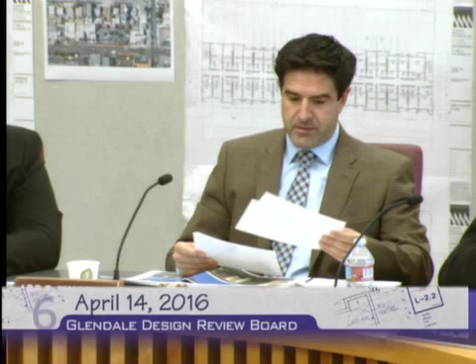Discussion is limited to items not on the agenda. I have no oral communication cards that have been submitted. Neither do I. Which brings us to staff announcements.

There is just one brief staff announcement having to do with an actual item on tonight's agenda, and that would be the first case for 401 through 409, that is, on Hawthorne Street. There is a continuance for this project in order to have the applicant prepare the correct historical assessment. So the continuance is being requested until June the 9th.

So this would be the first meeting in June for the Design Review Board. We would need to have an actual motion and a second and a roll call in order to continue that.

I'll make a motion to continue the matter. I'll second it. Okay, I have a motion by Board Member Mardian and a second by Board Member Charchian. In terms of roll call, Board Member Charchian? Yes. Board Member Benlian? Yes.

Which leads us to the next item on tonight's agenda, or I would turn the meeting over to Chairman Simonian, but I believe you'll be turning it back over to me. That's right, right back at you.

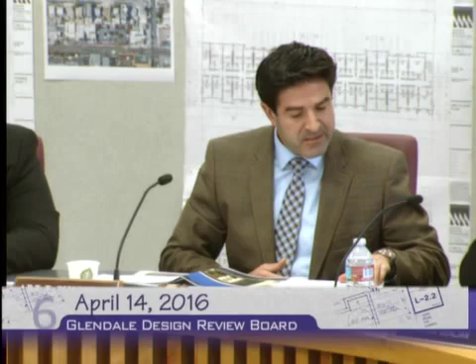And so we'll start off with our case PDR 1603498, I should say. And Ms. Zemaitaitis, you are the case planner, so please proceed and introduce the project to us. Thank you, Chairman, board members.

The case before you is for a project to be located at 1001 East Colorado Street, although the buildings to be demolished range from 919 through 1011 East Colorado. The proposal consists of demolishing the existing commercial buildings, which in this case is the World's Gym, and constructing a new 4-story, 134-room hotel on a 37,500 square foot lot zoned C3 Commercial Services Height District 1.

This particular project received approval of a standard variance to allow a 4-story building within a 50-foot building height envelope in the C3 zone. This variance was approved back on February 11th, 2016, whereas the planning hearing officer found they were able to make all the required findings in order to approve what would essentially be limited to a 3-story building in a 50-foot height district. In this case, they were allowed a 4-story building in a 50-foot height limit. So that variance has been approved.

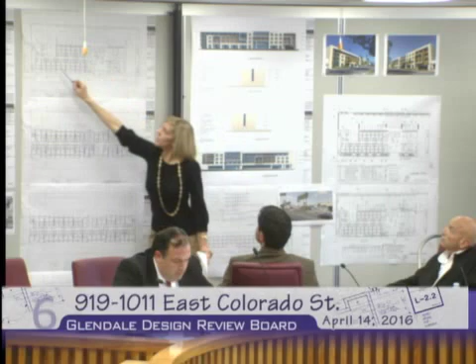Also, before I continue, when you look at the ground floor, you'll notice hotel rooms along the front on Colorado. There's the front entryway with a drop-off at the rear, so you'd come in through a two-way driveway with a drop-off area and surface parking. There's an additional pool at the rear, amenities on site including a fitness gym at the corner adjacent to the pool, and common conference areas as well as a breakfast area at the center towards the lobby.

Going back to the design and detailing discussion in the staff report, this is the front entryway and lobby, which is more of a focal point for the building. Then you have multiple layers and materials that soften the very elongated front facade.

The two interior elevations facing east and west are built up to the property line, so by building code they're not allowed to have any openings at the property line. In response to staff's recommendation, the architect designed actual light wells so the building is recessed at the end. Since you have a double-loaded corridor, this not only provides a bit of articulation on the ends of the building, but also provides natural light on the double-loaded corridor. The rear resembles the front facade.

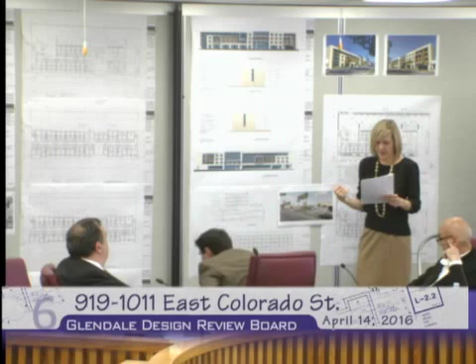This would be the actual elevation facing the neighbors to the north on Orange Grove. It still has the system of frames set within frames of varying depths that protrude and recess, with rectangular elements offset in the plane. As mentioned, the materials shown on the board are a combination of stucco, aluminum frames, wood-foam metal panels, and an aluminum frame curtain wall system and aluminum windows for the hotel.

The driveway, as required by code, will be a decorative driveway, a mixed gray pebble aggregate concrete. And the roof form, because of the overall height of the building, is just a flat roof, which ties in with the very clean-line contemporary finish of the architectural style.

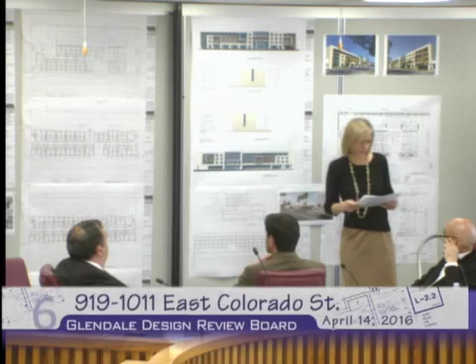Based on the analysis provided in the staff report and briefly summarized in the presentation, staff recommends approval of the proposed hotel project with a few conditions. One is to provide details for staff review of cladding at junctions where materials intersect, and the second is to provide a lighting plan and cut sheet details for staff review prior to submittal for plan check. That concludes staff's presentation. The project team is in the audience, and if you have any questions, I'd be happy to answer them.

I have a few questions, Mr. Chair, if I may. On your staff report, you said we have to have a 50-foot setback at the rear, but I'm looking at sheet A-1.1 and I see 47 feet on one side, 47.10, and 49.11.5. You also mentioned in your presentation a 5-foot setback along the rear for landscaping, but then I see 3.10, then it goes up to 5.1. So where are the trees, and by the time... is this a raised planter? I believe, and I'll look to the architect, it is a raised planter, yes. I know the story poles...

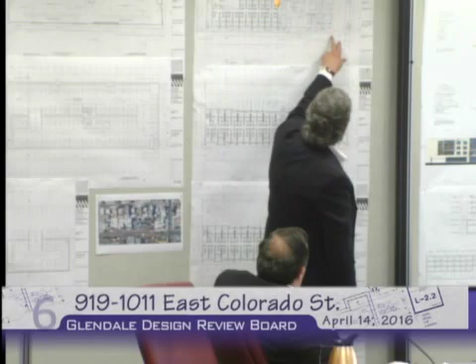What the proposal has is the ground level, the street level of the hotel, which will have the main entry lobby right from Colorado, and traffic would be coming in from Colorado, making a right turn into the property. That driveway goes under the building itself. If you look at that south facade, south elevation, with a decorative paved driveway, the cars would enter with a double lane into the back of the property, which would accommodate all the reservation parking or guest parking. And we have a drop-off, again a decorative drop-off area right behind the lobby.

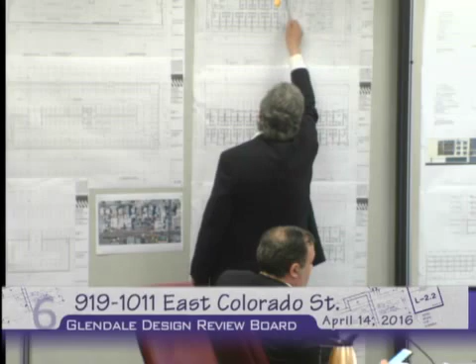This lobby, on both sides, the entry side and the back side where the drop-off happens, is all glazed. You can see through from Colorado all the way to the drop-off or porte-cochere area. The entries from both sides, or from the center, bring you to the reception desk and the offices in the back. This entry element is double height. Looking at the front elevation, on the south elevation, you can see the double height there. It's all glazed, so from the second floor above it can be viewed to the lobby, entry lobby, where guests would be congregating, and you could also see Colorado from part of the second floor corridor.

Double elevators run all the way from the basement to the first and second floor, operated by the key card. So if you're checking in to the hotel, they'll give you the key card for your room, which will also operate the elevators to the basement garage where your vehicle is parked. So we are complying with the parking requirement, as Vilija has stated.

Basically, the room mix is as required by Holiday Inn Suites. It will have typical suites. It's an all-suite hotel, targeted to service business people and families. Visitors would have a choice, either the double suite hotel with a double room, or larger suites, or standard suites, which are the typical ones.

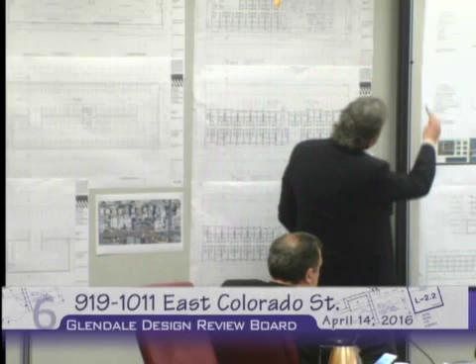By using this ratio, we try to create a facade that is as playful as the elements allow. As Ilya was explaining, we have the main core, which is the building surface itself, the wider area you can see. Because of the long facade, we tried to fragment this into two pieces. If you had this thing all the way continuous, it probably would look boring.

But the center portion where the entrance is, we're breaking that element into major fragments, the right side and the left side. So the midsection, which is the main lobby, the entry, and the rooms above, is identified by the glass element with clear glass so you can see the lobby and a bridge on the second floor. The upper rooms are basically the spandrel glass housing the windows of the fourth floor rooms we're overlooking. The difference between those surfaces is anywhere from 2 to 4 feet.

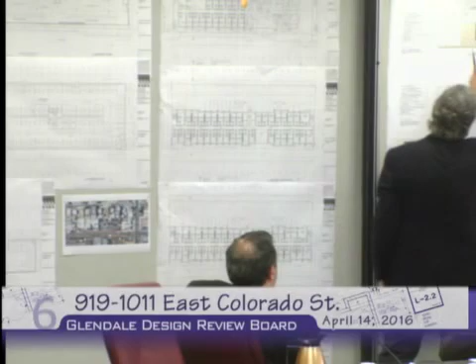Then we have those protruding elements that are framed with the composite metal, basically coming out of those main forms. And then we have the third surface, which is set further back — the recessed composite wood elements, this color you can see, sort of close to the orange color in the sample over there, where it would be recessed back.

So we do have this playful element in here that creates a variety of surfaces that play off each other and create those fragments that are playful with each other. At the same time, to identify the entrance and make it special, the column you see — a round column about 2.5 feet in diameter, metal clad — basically symbolizes the entrance itself. It creates an off-balance sort of thing; it's not symmetrical, but it creates a sort of symmetrical balance. If you look at those fragments, this midsection sits on that column, which identifies the entrance.

Now the signage will go on the building — the Holiday Inn Suites sign — at the location on top, and we will have it here on the rear side location as well. We also pulled the windows back here just to create additional space for light and ventilation.

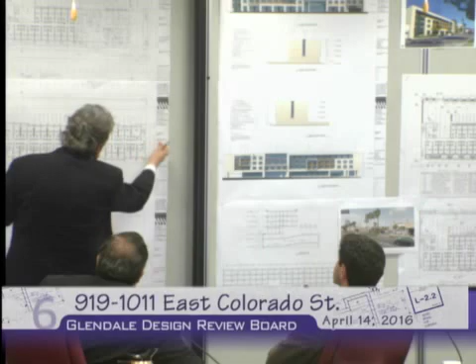Basically, the materials are cement plaster and composite materials like metal and composite wood material. Those are the three different materials used on the project, and curtain walls are also being used.

So if you have any questions, I'll be happy to answer. Mr. Judge, I have a question.

Sure. Was there no room to manipulate this roof and play around with it a little bit — up and down, to break that monotony? Now, I know you have height restrictions, but it would have helped. I mean, I like the cohesiveness of the design.

Well, first of all, we're looking at a project that is a hotel. Because it's a hotel, it gives us the ability to create 5 levels within the 50-foot height, because of the 10-foot floor-to-floor height, and also the first level is slightly higher than the others. So there's not much room to create a break within the roof, and those typical room layouts are normally fixed — it is what it is. There's not much room to play around.

Besides, as architects of the hotel, this goes through a number of reviews with the hotel committees and hotel staff. They have their own architectural team which reviews this and comes out with their recommendations as far as uses and functions are concerned. Taking it down would mean losing floor area. Not down, maybe just a couple of feet or something. Pushing it up, we'd be going over the height limit. So that's what triggered this.

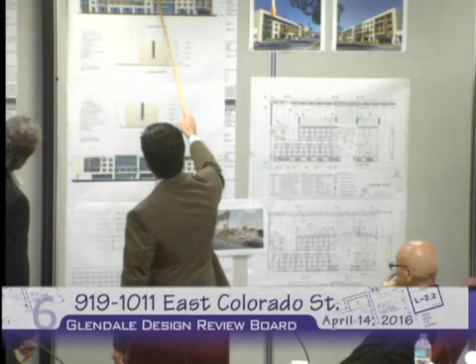As Mr. Mardian was pointing out, to create some undulation on the facade, you have this window, this spandrel glass that's in line with the parapet. What was preventing you from pulling down this spandrel glass below and putting some sort of safety glass behind it, not visible from the street, to create undulation on the roof? We thought this is a cleaner design because the glass facade line continues all the way through. By dropping or pushing back and creating another layer there, we'd be deviating from the concept, since the two dominant elements we have are those two.

And then we have these playful forms protruding in and out from those forms. What is that material on top of the glass above the entry? Those are aluminum. This one? Yes, the top one. This is spandrel glass - it's a glass element, just like those, all the way to the parapet line.

And what's behind it, rooms? Yes, this is the rooms, and the walls. But the solid area at the top behind it is the parapet. So the spandrel will move all the way to the top, and we have a metal coping, which is the same as the mullion - the mullion size will run all the way across.

And what about those aluminum projections, which are contemporary in themselves? Yes, those. But then you're kind of overlapping them onto the stucco. What was the thought process there? Because they're not overlapping on some sides - for example, this one overlaps onto the stucco, whereas in other portions it's matching up with the lines of the building.

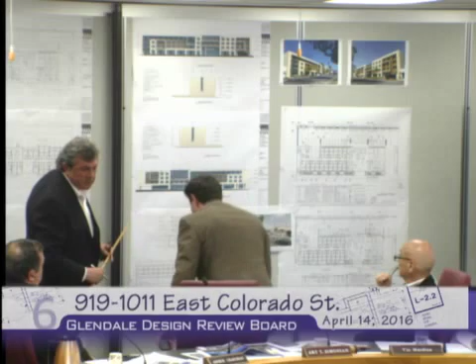Okay, do you have color samples for us for the windows itself? Yeah, it's simply an aluminum, brushed aluminum. It looks like in the renderings though, it's kind of an aqua green texture to it. Oh, you mean the glass? Yes, the glass is aqua green. I think we have a picture of the aluminum window itself, but the spandrel color would be this color here.

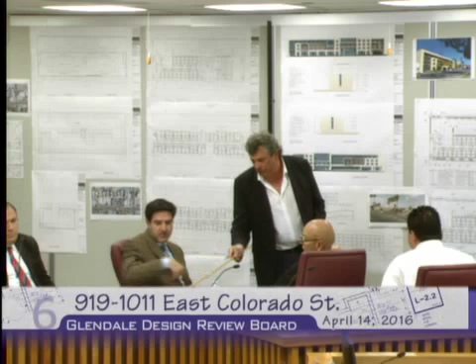Yeah, this is out of our project that we used. Is that what's behind the AC unit? The rooms are all ventilated with remote control AC units, which is within the window itself. It's only 8 inches thick.

So there are no mechanical equipments on the rooftop, if you have concern about that - every unit has its own package. Yes, you lead me to that question I wanted to ask you: how are you dealing with, you have a substantial garage size, how are you dealing with the ventilation?

Well, the ventilation - we do have certain areas that we're going to be ventilating through the project, and it continuously carries out, right to the staircase area. So you're going to have natural ventilation? No, mechanical ventilation. So you have room, but that mechanical unit is not going on top - it's not going on top, it'll be situated somewhere in the garage to ventilate that.

And as far as the building, the bookends are concerned, you've pulled the corridor windows in to be able to meet the fire code and create some undulation on that facade. Were there some other thoughts as well of how to introduce additional articulation on those end pieces? Such as materials, breaking up the stucco with score lines, having reveals, having some sort of a material?

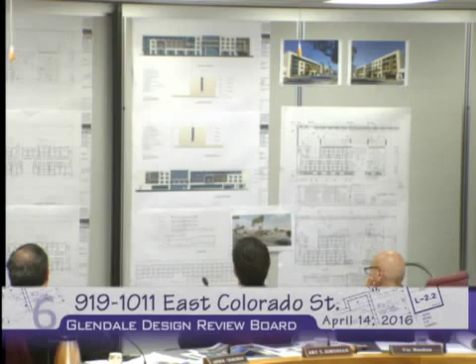And then one last question that I have. I see the contemporary kind of frames that you're going after, and you've done it in other architectural designs as well. And then you have these metal components, more specifically these, that are kind of stepping away from that simple white stucco frame that creates the contemporary look you've done in the past. So what was the thought process of actually having those in there? Doesn't it just take it away from the frame, creating this busyness that kind of cheapens the design where there's so much going on? What were the thoughts on that?

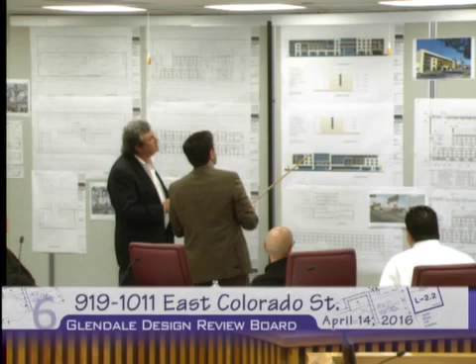Yeah, let me say this - you're seeing this as a frame, but I don't see it as a frame. I see it as a box, one unity box, which is white, cement plaster, and it's punched with the window openings. However, it does somehow frame out at the ends, but that element is playful by itself. If you look at it in perspective or in three-dimensional form, those elements are certainly box forms coming together. To me it's a rather sculptural impression than just a frame in this design.

So I didn't want this to be a line and that to be a line and another line doing this. I'd rather have massing and then carve out elements out of that mass, out of that form, rather than have a linear frame and then implement those. I think the perspectives would do the justice if you look at it - you can see that it's something that's carved out of those white forms.

I understand. Yeah, in a sense, every time you extend it in every which direction, they'll totally change the facade. Yeah, that's fine. And so, in a way, this north elevation that has the windows kind of going across it - correct.

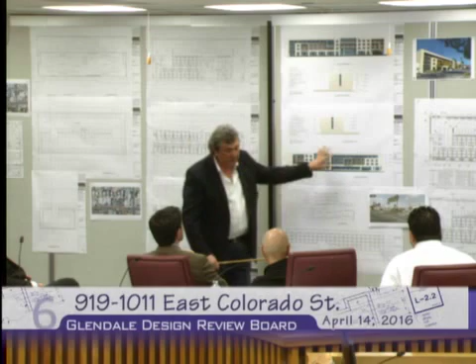At the end of the day, it's ornamental. The whole idea was that you subtract those elements out of those forms, and then apply materials with various depths to treat them differently. So the story behind this is basically playfulness, and we're trying not to make it identical. The fragments are different from each other so it doesn't look boring, yet they come together as one unity, one composition, as an architectural form.

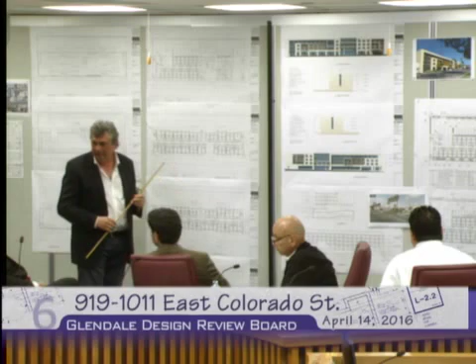I just have one, actually two. What is the treatment on the gate or area between the driveway and the pool? And my second question is about the refuse area. What's the barrier, is it wrought iron?

No, this area here, the swimming pool area, has a buffer of landscaping, as William mentioned. Between this area here, yes, it would be glass paneling all the way through.

To make it level, at the same level as the pool level, from pool ground up would be a glass railing, hopefully with some protecting bollards in front of it.

No, actually it's a right question. This is raised compared to this because we start here, about 4%, then 2%, then 4%. By the time you're here, you're already 5 to 6 feet below the pool surface, so it gives you the visual protection.

My question earlier, I thought you answered by saying it was on grade. A level was on grade, yeah, but the pool is higher than this. But this is all deck, a concrete deck.

So you have some sort of concrete wall with glass plastered as a guardrail above it. It shows in the section, the silhouette, right there. You can see it. He's saying the grade is higher, but I don't see how that's the case.

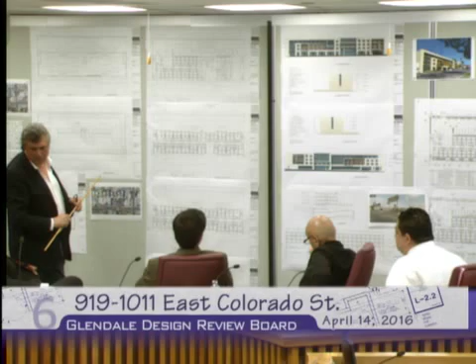And then with a hotel this size, with 134 rooms, the refuse area seems to be somewhat small and also located quite a ways away in the traffic flow.

We're kind of working on that with public works right now. But I think the sizes are per the requirement with the city. The location, though, could be relocated somewhere closer for the pickup area.

We do have a room. If you have room for maybe a chute, I don't know if you do, you might consider that as well. Yeah, we looked at a trash chute, but sometimes they don't work well.

Because you do have a staff of 10, 15 people working every day carrying it. So this is very typical to our multifamily refuse system, where the truck comes down, picks up the trash arrangement, the large bin, takes it up on Colorado, and it sits there for half a day until someone picks it up and brings it in.

Hopefully they put it within the system, so you might want to think about an area where they would put it in, so it's not just floating in the middle of the street. They're going to put it in front of the lobby.

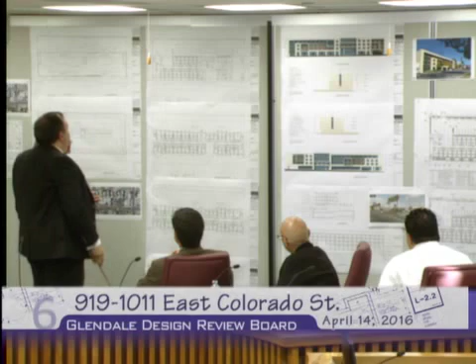That's what I'm saying - it might be good for us to think about where other locations would be for drop off. There are other locations, but logically, dealing with placing trash pickup on a weekly basis, they're going to put it at the most convenient location for them. But that could be arranged in a manner the manager wouldn't like to see.

Arrange with a refuse company - we do have room to tuck it under this area, but as I said, we're still working to identify the location. I just wanted to bring that to your attention. I think it can change your parking.

Whatever they do, they've got to pull it out into the street because that's where the big truck picks it up from. Correct. So the question is going to be, do you have a designated cutout of the curb in that area where it kind of goes in? It will come from the driveway. Yeah, it's going to come out from the driveway anyway. But again, this is not a restaurant project where you have that much refuse going out.

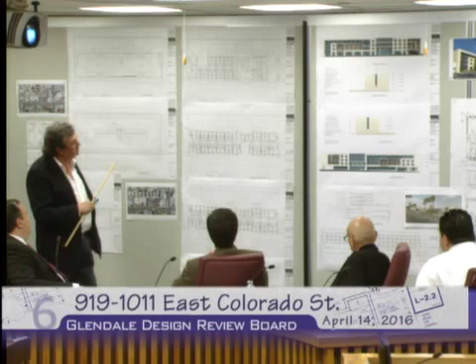It's a hotel. We do understand that, and the maintenance is upkept by the staff or personnel. My comment is going to be that you really revisit the refuse plan with the city, because I think it can alter the design after the fact, after we reviewed it. I do not agree with the statement that this isn't going to generate a lot of refuse. These are the types of places where business people might spend a week, two weeks. I personally have spent three months in a place like this, and you do generate a fair amount of refuse, especially if you're eating out a lot. So there's a lot of actual refuse.

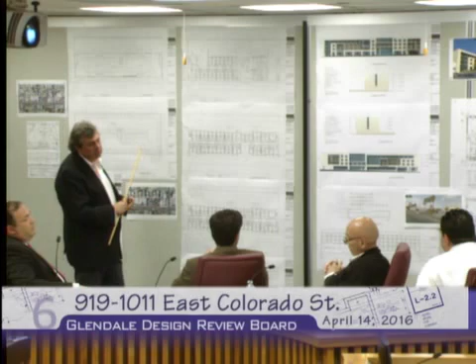So I like the plan overall. The one thing that stuck out at me was that this entire 134-unit facility is basically using one dumpster and one recycle dumpster. If that's the size requirement, well, they'll increase the service portion of it, like twice a week. You could go every day - you just pay for it. There's another alternative, there are other alternatives.

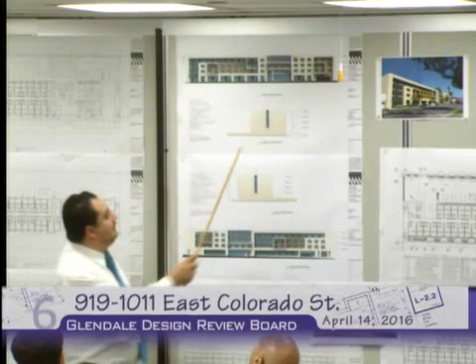The only issues I see are these rectangular aluminum pieces. They kind of feel like they're not part of that box. You have this box where everything, all the other elements, kind of fall into it. They feel like they're part of the design. These feel like an afterthought, like ornamental elements that aren't doing anything. I'll give you an example of what I'm saying.

For example, this one here, you see this frame, and then you see the space behind it, or this one here. You have the same exact windows and same exact rooms happening here. But if this was your gym or fitness center, and I'm looking here and I see a piece of glazing, a whole glazing area, all of a sudden this thing is highlighting something, highlighting a function, and it's becoming part of the overall design. Right now it feels like, okay, this is my windows, these are my rooms, let me put some piece of frame here, and it's not doing anything else.

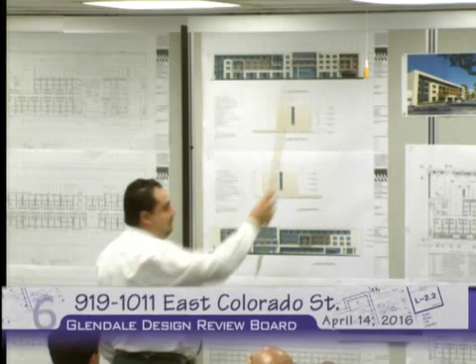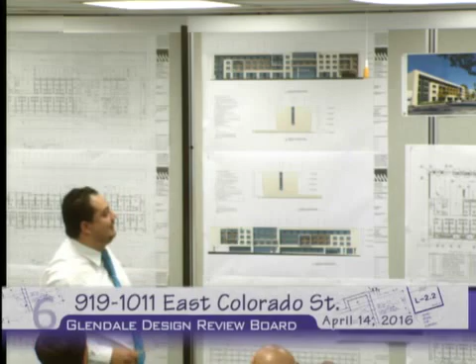That's just my feel, but overall the design is nice. Everything else works well. I'm not sure if the one column is doing the job of balancing the thing. I think it looks awkward, but that's my personal taste. I'll leave it to the other guys to talk about that. But overall I think it's a good design, and I'm in support.

Okay, thank you. Mr. Mardian? Thank you, Mr. Chair. I concur with some of the comments Mr. Bellion said, but I like the cohesiveness of the design.

I actually disagree with you about these frames. I want to call them picture frames - they have cohesiveness in their location. Although they're randomly located, they create this modern interpretation of this building, which further defines it. I have no issues with the locations of it. It gives you a little more play.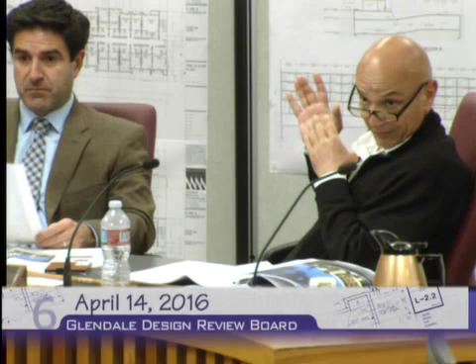The only criticism I have, and I don't want to take your creative juices away, but I do agree with you, Mr. Bowman, about the column. That column seems at odds with the building. I know you're trying to, but have you thought of putting another column on the other side? Yes, and it didn't work. It didn't work? Because I thought maybe, or totally eliminate it.

Because it seems at odds with the building. I don't mean to take away - I know you're creating something different - but I feel like you have some symmetry going on, yet they're not exactly symmetrical. I'll wait and see what my other colleague says. And again, going back to my earlier comment, maybe Mr. Simonian alluded to it, maybe that middle portion on the top needs to be dropped down at the entry, and create something in the background. But I'm willing to listen further to what my colleagues have to say on that.

Other than that, I like the choice of material, the quality of material. I know your constraints on the height, and I like the design, and I'm in support of it, with the exception of these two items. So I don't know if the board feels differently about it, then so be it.

And just to clarify, yes Mr. Rennie, I'm not against these frames. I think you're absolutely right, I like the placement, I like what they're doing. The only thing I don't like is they're just a frame, and what's happening behind them - you're talking more about form following function, something like that. Or maybe you don't change the form, but you change it so it gets a different kind of glazing, something that identifies that hole as a box, not only as a frame. What do you suggest? Any suggestions?

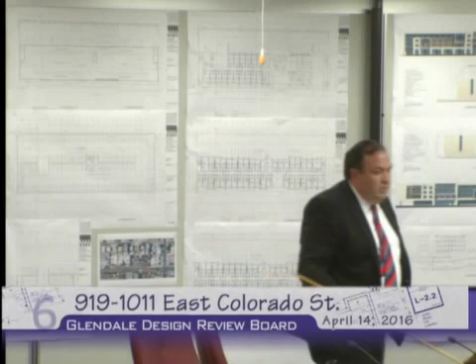The areas that I have additional concern with are back here. I didn't mention it earlier because I'm just going to make a suggestion, I don't think it's going to be a major thing. I think this entry area, where it looks like there's one entrance and one exit, could be reworked with maybe some sort of open folding glass concept that you could utilize for that lifestyle lounge that you have.

Because right now you have a great entrance from the front of the property, very monumental in a way. And then you have one that is meant to be monumental from the back, which is where 90% of your traffic is going to come from. People aren't going to park on Colorado, I don't think, to check in. They're going to go to the back.

And that entranceway goes through an elevator corridor, and then you have this lounge area that could very easily open up to that space and create an open space between the lounge you're creating and the outside space. Even if it's not used very often, I think it's a feature that can be utilized for specific events or for breakfast service or whatever the hotel is going to offer.

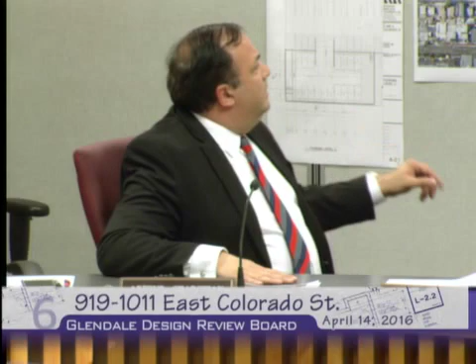And then I would have commented on the mass on the east and west elevations, but that was addressed with the non-placed but designed elements for the joints. That would be my only concerns. Otherwise, I think it's a great addition for the neighborhood, and I support the project overall.

Thank you, Mr. Charchin.

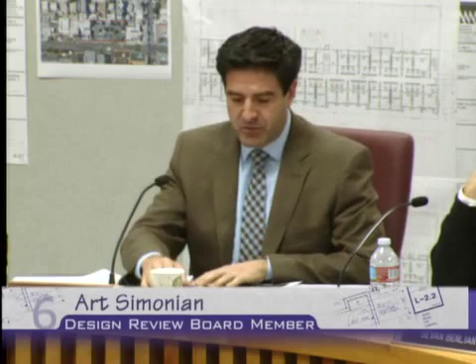I'll start off by saying I support the project as well. It's well done. This is a part of our city that could use the economic development going in there. It's a part of the city that doesn't get a lot of new capital infusion, and it's certainly, I think, the direction the city wants, to create some excitement on that part of Colorado, so that fits in. And also it's providing a hotel in that area, where there are none.

There's a lot of motels and those kinds of things, but nothing of higher quality, so it's certainly a use that I think is needed. As far as the architecture is concerned, I think anytime you have a hotel, especially a brand name hotel, you're dealing with corporate layouts, corporate dimensions, corporate colors, corporate logos, signage, etc. The list goes on. So it is not an easy design problem to fix as an architect, because your room dimensions are somewhat vanilla, stacked one on top of another, and now you're trying to create excitement over 300 linear feet of frontage, and it's not an easy exercise.

All in all, I think you've done a very good job of creating that excitement and giving it identity, making it more of a unique piece of architecture. So in that, I think we're all pleased with the overall direction and quality. The material board as presented also depicts a higher-end material, and that, coupled with the undulations created in the facade, kind of takes away from that 300 linear feet of facade.

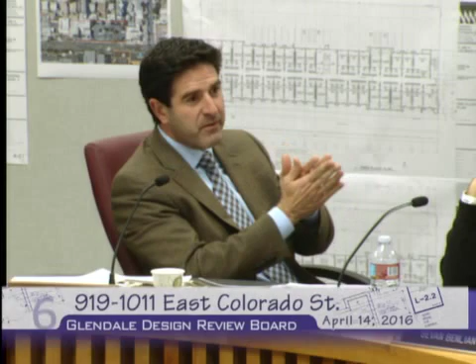But that's something I think would really help the project, no matter which way we're looking at this. The other is the column that you're referring to.

Again, some of these comments that we're making, I don't think are big. They're not going to make big differences in your construction schedule or in changes, but I think you realize that as well.

You have this column, and then you have this sign here, which is going to be the sign or whatnot. You could do something creative where instead of hanging this sign like you're doing, you cantilever it off this column, and it could even overextend itself a little bit past the column, so that column then all of a sudden has this other piece protruding out from it that becomes signage.

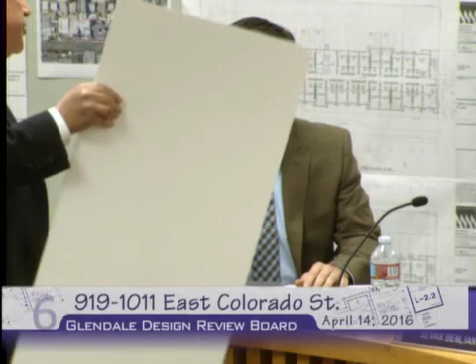So those are some ways where you could start. In fact, the column is supporting the... there you go. In a way, the elevation isn't depicting that, but you're already thinking down that line. Exactly, it's on the rendering. But look at the 3D picture, it will show you. I think this creates a major support for all these assemblies coming together.

Take that, then this becomes a toy. So this supports that and supports the main itself. And adding it over here, it would be like something that doesn't work. Sorry. You could leave that there actually, and everybody could look at it.

That was my personal opinion, that I like the column there. However, I think it really could start working in, and I'm trying to create some compromise between the board members, as to how that column could start having some function in itself. Just a thought as to how that could be dealt with.

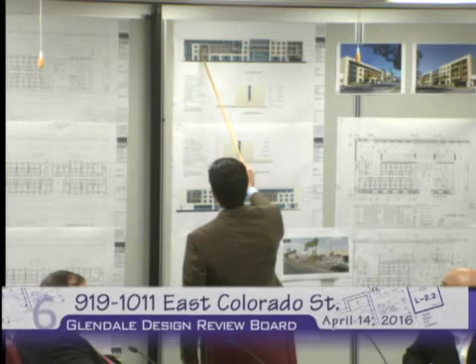The other comment was Mr. Bolling's comment, as far as the aluminum projections are concerned. I myself had similar comments, in that it's really overlapping onto the stucco portion, which in itself is taking away from the purity of what we're trying to achieve. So you put it on the inside, those windows get smaller, which I understand isn't going to work. So then do you go with a different kind of material inside to really emphasize what is being framed inside?

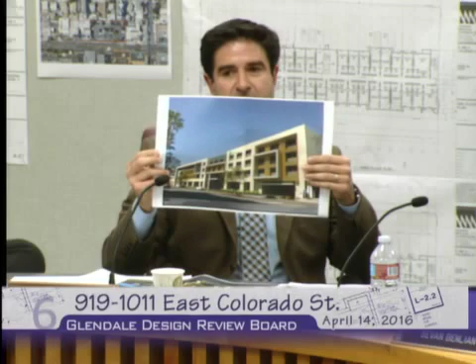I don't know the answer to that. It's hard to say without looking at some examples. But I do think that there is something there, because when I look at this and I look at the wood area, and then I see the frame itself and the wood is behind it.

It really emphasized that kind of ornamentality of it, that it's just this glued on thing. Whereas if something different is happening behind it, which could easily happen, even with the same spacing but a different material, might really lend itself. Maybe it turns into more of a corrugated metal behind it. What if the spandrel were the same material as the frame of the box? The window surrounding walls? So there would be a fully aluminum piece.

I'm a little afraid of adding another material to this building. Already busy, yeah. And there's something to be said about that. Maybe it really becomes this wrapped metal or some sort of metal siding that is the same color as the aluminum itself, which could easily be accomplished.

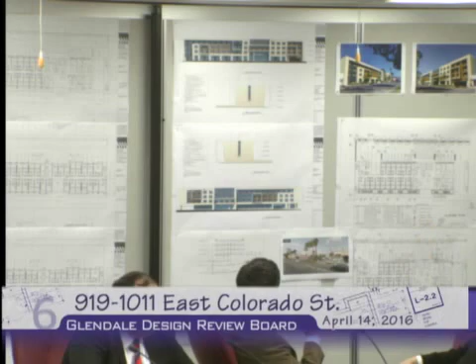No, I think lowering it looks better. I don't agree with that. I'm hoping that when you do that study, you'll go, aha, it does look better, but at the moment you don't believe that. Believe me, we went back and forth with staff many times. We had many iterations—stucco, lowering it.

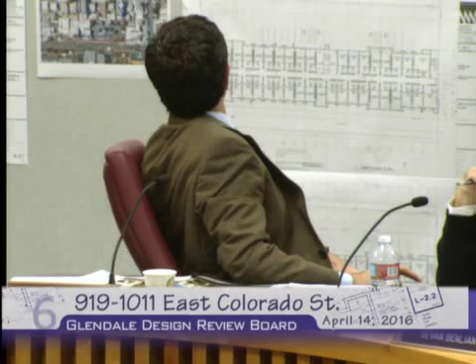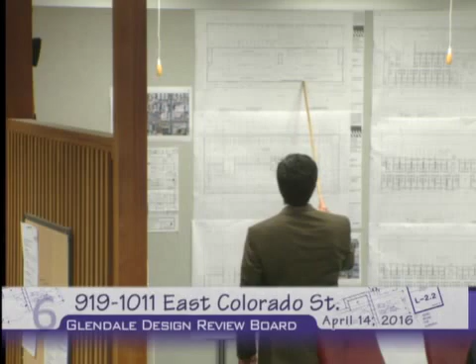We're really talking about this area over here, right? That would have a lower parapet than the rest. And so you could have some sort of metal guardrail back here that still protects your 42-inch. And so all you're doing is just lowering this, and as Mr. Platt is saying, this stucco would carry itself back with the wings.

Excuse me, Art. I don't think that was the design intention here. I don't want to break the building into three buildings here. Connecting the parapet at the same level and a continuous variety of the material that is pulled out, minuses, subtractions from the forms is the vocabulary here. If I start playing with the ups and downs, that is a totally different opera here, a totally different game. So to me, for my design as an architect, it's essential to keep that as a level, and I'd appreciate if you recognize me as the architect of the project.

Thank you very much. So we'll go ahead and close the public portion again.

Do we have any other comments or conditions, comments at this point from the board members? No. Okay. So let me make a suggestion, Mr. Platt. I think now's a good time to go over what you have already, and I have a feeling we could quickly summarize them as to what are conditions and what are comments or study items, if any.

Sure, I'll just go in order as we've discussed things. We're going to make sure the drawings indicate that there are reglets on the side facades that are already proposed, just to make sure they're visible to break up those facades. And if I may add, the column on the plan is not shown. Okay, we will add the main column, the sensitive column that we have. We will have a condition to revise the plan to include the location of the column.

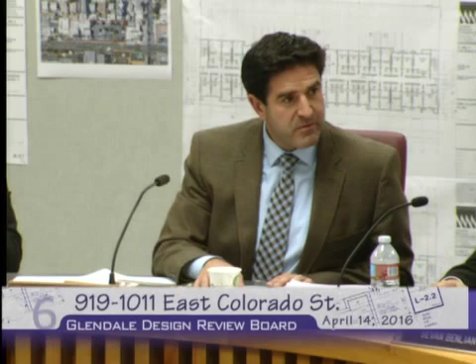Oh, I'm sorry, I did skip one of the comments from Board Member Charchian about the openable glass wall at the lounge area. That was just a recommendation, but if we get consensus, we'll include it, if not we'll... I like that idea actually, opening up the back further, you know. They can consider it as part of the other consideration.

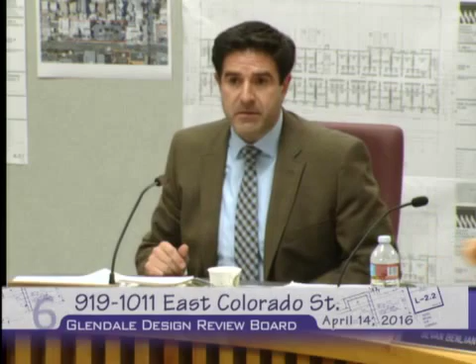There is some room here. In other words, here's your driveway. You have this area that can lend itself to something happening, where if someone's staying there long term, they'll have some area to sit outside or whatnot. So that's more of a consideration to study that component. It's a consideration, so, for you to study it. For you to study it. Just study and do whatever you want with it.

Okay, yep, that's everything, so... All right. Now, before you make your final decision, we do ask that you acknowledge the mitigated negative declaration that was included as part of your staff report. And I'll make a motion to acknowledge the negative declaration. I'll second. And that's all in favor. Aye. All right, and so I believe that there is, I'm sorry, is there a motion to approve with conditions?

I'll make the motion. All right, Mr. Board Member Benlian made the motion, a second by Board Member Mardian. So in terms of a roll call, Board Member Charchian? Yes. Board Member Benlian? Yes. Board Member Mardian? Yes. And Chairman Simonian? Yes. The motion passes unanimously, 4-0, to approve with conditions.